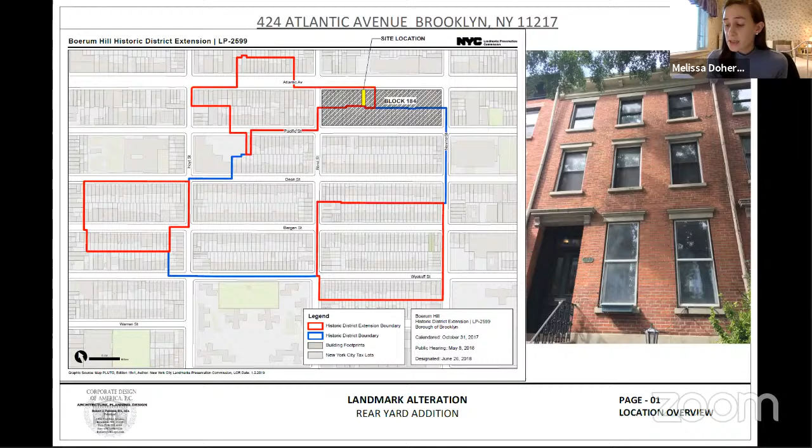This addition will be modest in terms of depth and will maintain significantly more central green space by comparison.

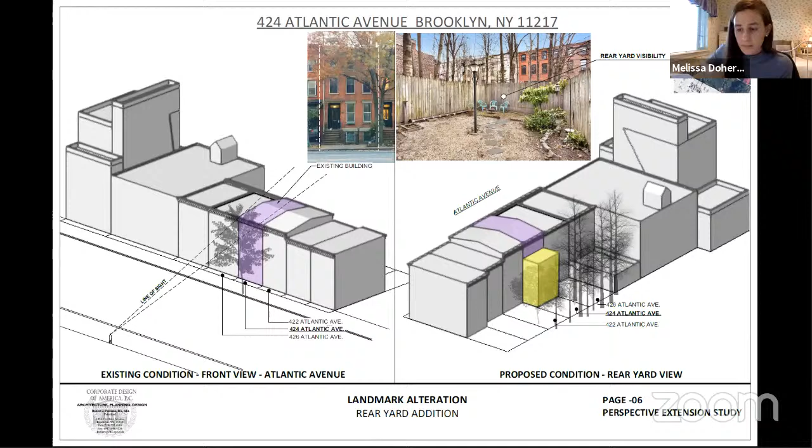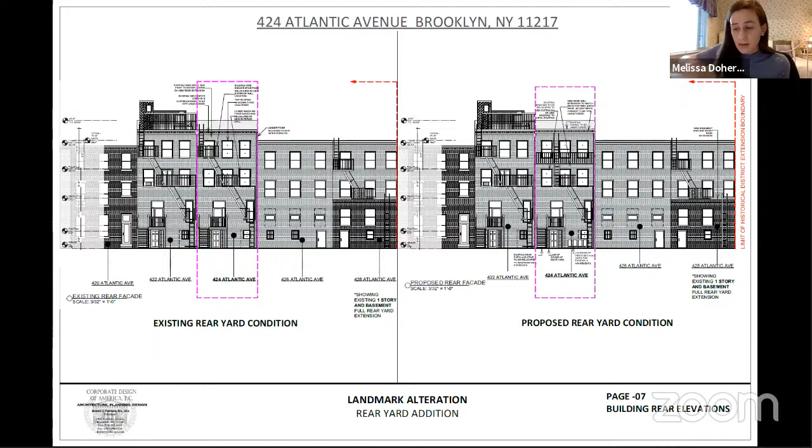Here we have the existing and proposed rear facade elevation drawings with the two adjacent properties on either side shown here. And here we have a more close-up view of that rear facade elevation.

As you can see, the proposed addition will be a total of 3 stories in height and will be fairly consistent with the existing rear facade in terms of materials, design, and even fenestration. It will consist of plain brick masonry. This will also include a terrace on top at the 3rd floor, and the existing fire escapes present at the rear facade will be retained and reinstalled at the new addition.

Here we have some more context photos showing the existing conditions at the rear of the subject property and at the two adjacent rear facades.

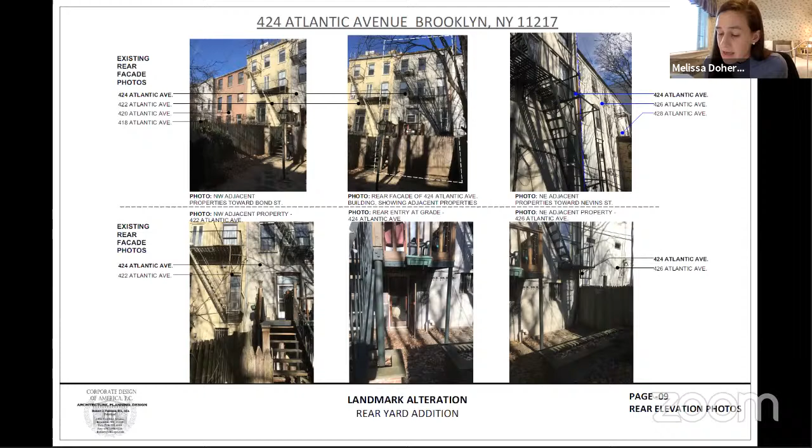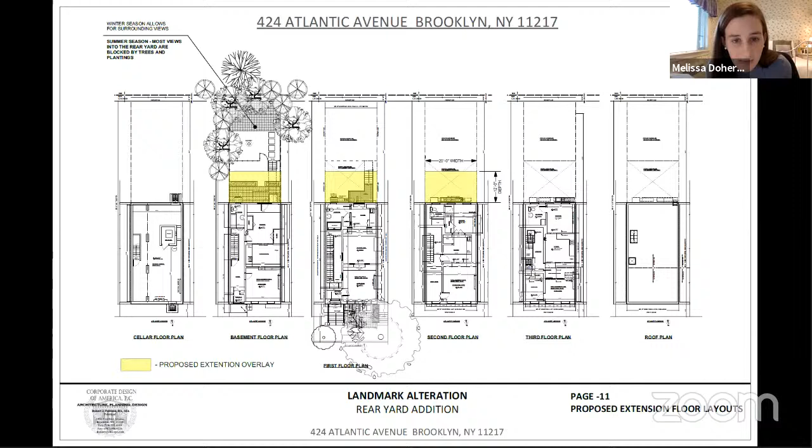Here we have the existing floor plans with an overlay of that proposed addition at the basement, first, and second floor.

And finally, we have some renderings of the proposed rear yard addition at several different angles and in detail within the context of the site.

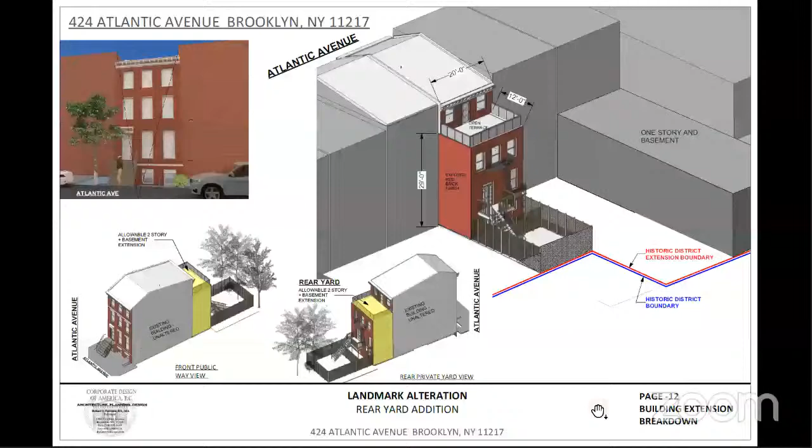Yes, so the 3D block plan. As Melissa mentioned before, the extensions, if you look at the entire block, they go full height, full depth of the lot, even though they go only 2 stories. So in comparison, even though we have 3 stories as an addition, it seems much less in scale compared to other rear extensions.

There is also an example in the lower left of an extension in the rear that is a combination of 3 and 2 stories towards the lower left of the drawing. So I believe if we analyzed all the examples of extensions in the rear on the entire block, we're the minimum, we're the least of the extensions already in existence.

In terms of square footage, you think you'd be the smallest? In terms of square footage and actual depth of extension, yes. Okay, both criteria. And Atlantic Avenue, is this section commercially zoned, which allows for full lot extensions, which I guess explains the variety that we see here.

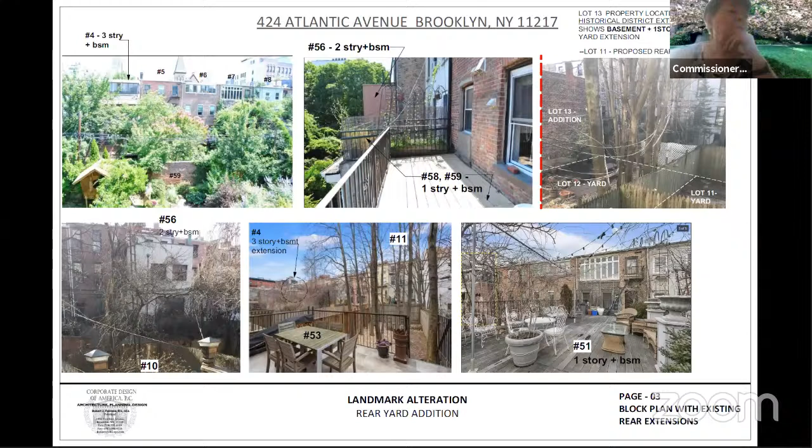If I may speak, on the opposite side of the block, the buildings facing Pacific Street, if you look at the lower left corner, it's labeled building number 56. This extension goes all the way up to 2 stories and basement. The larger extension goes 2 stories and basement, which approximately matches our proposed extension, but in this case it goes even past the 12 feet we're proposing, so it's slightly larger than what we're proposing.

Besides that, you have 1 story and basement additions. So these are the best comparisons to what we're proposing. Thank you. Do we have any other questions?

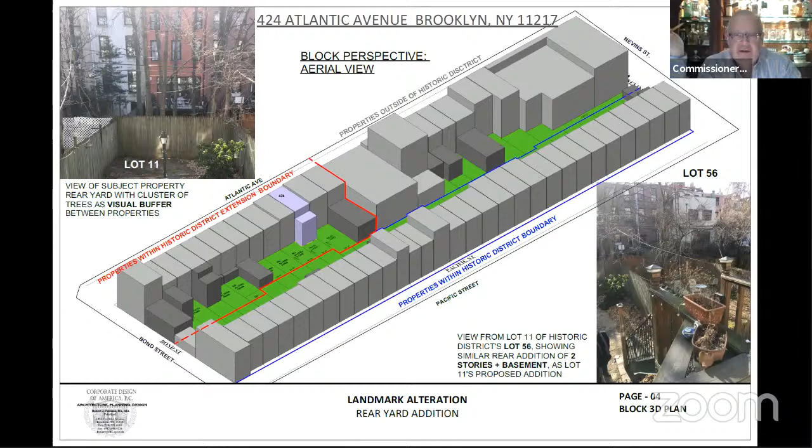Commissioner Jefferson? I approve it, I agree with my fellow commissioners. Commissioner Gustafson? Yeah, I think from every standard that we use, this is appropriate. It's modest, it's not visible, its design is compatible. There's no issue here whatsoever for me.

All right, so I think we're all in agreement that this is appropriate in this context and on this particular building. So Commissioner Shamir Barron, would you read the motion?

Yes. In the matter of LPC 2001817, 424 Atlantic Avenue in the Boerum Hill Historic District Extension, a transitional Greek Revival Italianate style row house built circa 1855, the application is to construct a rear yard addition. I note the building's style, scale, materials, and details are among the features that contribute to the special architectural and historic character of the Boerum Hill Historic District Extension, and that Atlantic Avenue is a commercial thoroughfare where full lot rear additions are allowed by zoning and rear yard conditions are varied.

I recommend approval, finding that the proposed rear yard addition will not eliminate any significant architectural features, that the proposed work will not be visible from any public thoroughfare, that the proposed addition will be modest in terms of depth and will not diminish the central green space, that the presence of a 2-story addition will not overwhelm the building or detract from the special character of the block, given the building's location on the commercial side fronting Atlantic Avenue, which contains several deep 1-story rear yard additions and other larger commercial buildings, that the proposed addition will harmonize with the existing rear facade in terms of design, material, and fenestration, and that the work will not detract from the special architectural or historic character of the building or district.

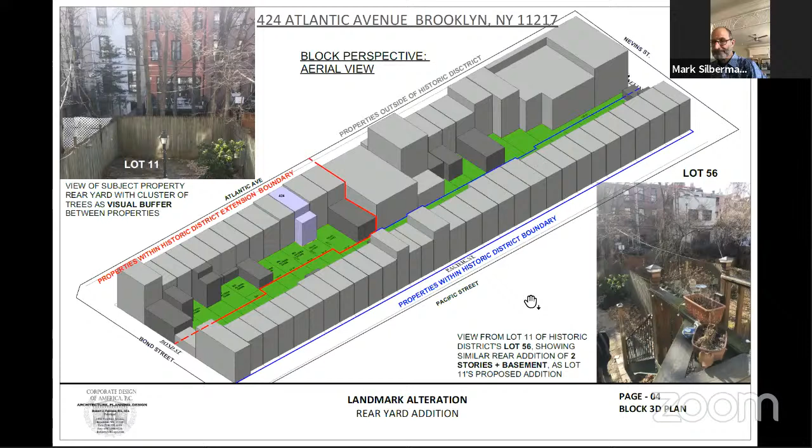And Mark, are you calling the votes? Yes. Chair Carroll, Aye. Commissioner Bland, Aye. Commissioner Shamir Barron, Aye. Commissioner Chapin, Aye. Commissioner Chen, Aye. Commissioner Devonshire, Aye. Commissioner Goldblum, Aye. Commissioner Gustafson, Aye. Commissioner Jefferson, Aye. Commissioner Lutfy, Aye. Commissioner Holford Smith, Aye. With 11 in favor and 0 opposed, the motion passes.

All right, so that's approved. Thank you. And we'll move to the next item.

The next item is hearing item number 2, LPC 21-08216, an application for a certificate of appropriateness in the Borough of Brooklyn, Block 43, Lot 25, 70 Hudson Avenue in the Vinegar Hill Historic District. This is a Greek Revival style row house built circa 1828. The application is to install entrance infill, stairs, porches, and windows.

Commissioners, the applicants have joined the hearing. You now have control of the presentation. You can use your arrow keys to advance the slides. Please remember to unmute yourself and state your name for the record, and you may begin.

If you could just please unmute yourself. Vanessa, we cannot hear you. Please unmute yourself. I have to go back to the beginning and start over the presentation. Is there someone else who can step in, perhaps the staff? Hello, can you hear me now? Yes, we can hear you now. Oh, great. So I have no controls on my screen, so I couldn't unmute myself. Thank you. If you can go to the first slide. You have control of the presentation. So oh, I do. Just click on it. It was just the audio that was having issues, so you can continue. Okay, let me. Apologies, I'm trying to get to. So the arrows are going the wrong way.

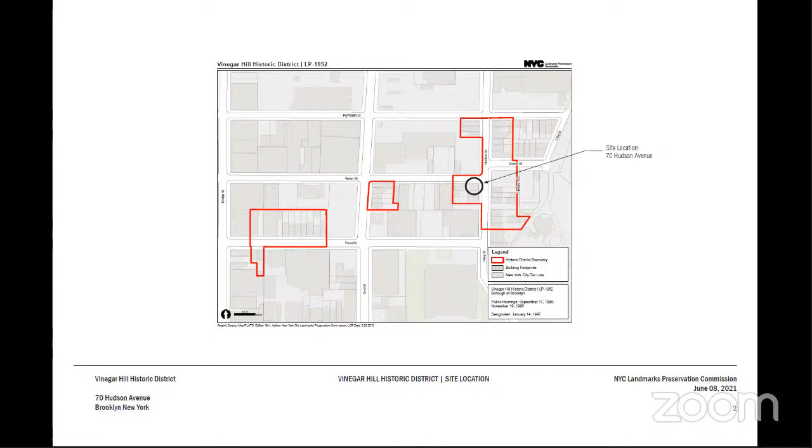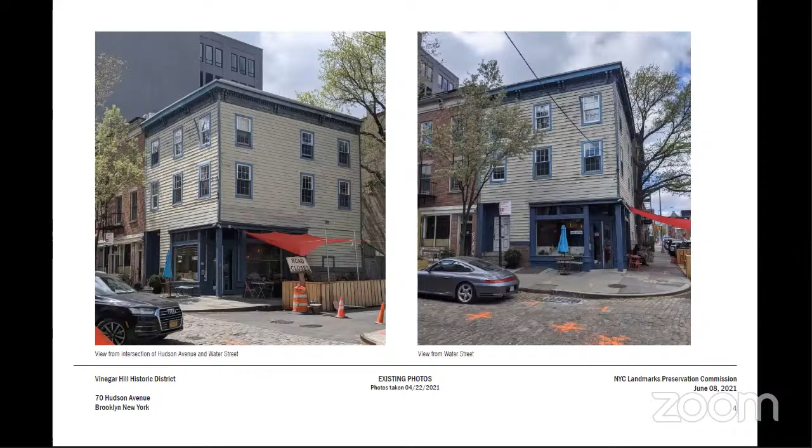As a note, the red tarp shown and shed structure at the rear yard is temporary. They were installed recently by the first floor tenant, and this is not part of the final proposed design and will be removed. The designation report lists wood clapboard as the original existing facade material at time of designation.

We are proposing to maintain this facade material as clapboard siding. This is a change from the previously approved application, which called for cedar shingles with a thatch paint finish.

So now I'm going to go through the elevations. For context, the existing elevation is all the way to the left. The previously approved elevation is at the center, and the proposed elevation is all the way to the right. There's revision clouds at the areas where the changes are.

For the Hudson Avenue elevation, clapboard siding is to remain and to be repainted to match the existing color. The residential entry will have bluestone treads over brick steps, a solid wood door with side lights and transom. There will be a trim piece added along the edge of the building to match the historic condition, and a globe light fixture at the entry alcove is being proposed.

At the Water Street elevation, the only change you can see is that the clapboard siding will be remaining. If you look to the elevation all the way to the right, there were previously approved balconies that had cedar shingles as a finish, and we are proposing to have clapboard to match the existing building. So that would be the cladding for the balconies.

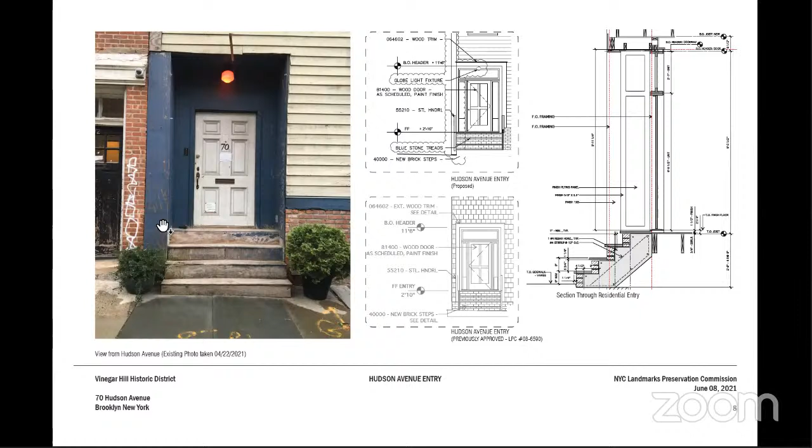The door opening is a few inches wider. No, actually, the door opening is correct. What happened is there was an edge condition that wasn't detailed correctly, and you can sort of see it here. So we had to make it a little bit more symmetrical. Okay, so what was previously approved was not drawn correctly. Yes.

Okay. Other questions?

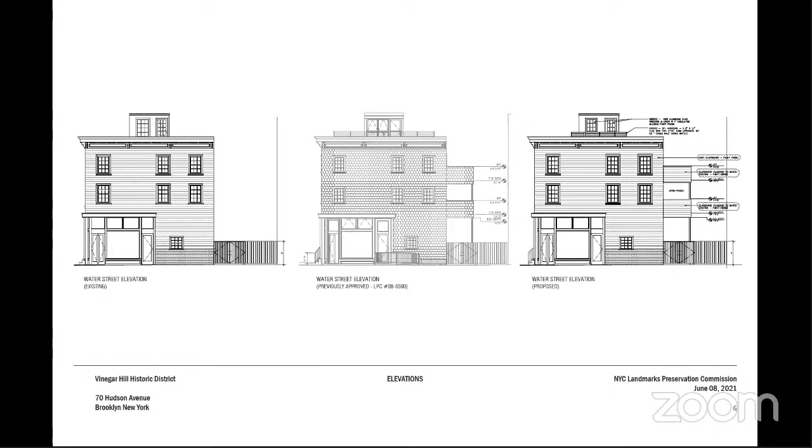But the idea is actually to keep what you have and then add to it, right? Yes, the idea is to keep what is there, and if there is a piece that is not in the correct condition, to replace in kind and have it match what's existing. It's clear, thank you.

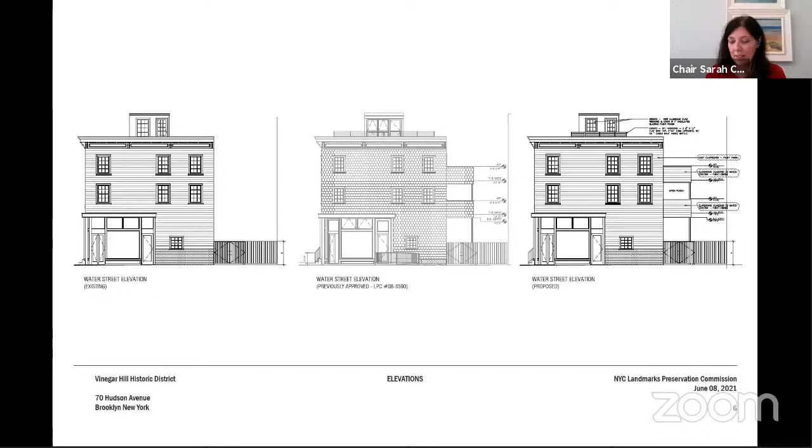And of course the new detailing on the balcony now that it's supposed to be clapboard. So it's really those three areas, which is really two areas, I guess: the front entry area and the rear facade fenestration and balconies. Commissioner Holford-Smith, would you like to start this one?

Sure. Well, I'll start with the clapboard. I think that given that it's the existing condition and they're looking to repair it, I can find it appropriate to maintain it. I think that they should maintain the corner trim boards that are there. I'm hoping that that was just an omission in the drawing, that they wouldn't be taking those off.

The rear facade - I think that changing the windows from the 6/6 to 1/1 is not appropriate. I think they should remain 6/6. And I think perhaps the applicant could work with staff on the organization of the back windows. The one on the second floor, that fixed window, is very out of place, that sort of horizontal configuration - I think maybe they could work with staff on that.

And I think I would recommend the multi-light even for the bathroom windows. And as for the porches, I agree, I think that they need to work on the details, which are very undeveloped here and hard to understand. But I think the clapboard is an odd choice to clad the porches.

And I would think that something more open, like a wood picket, would be more appropriate.

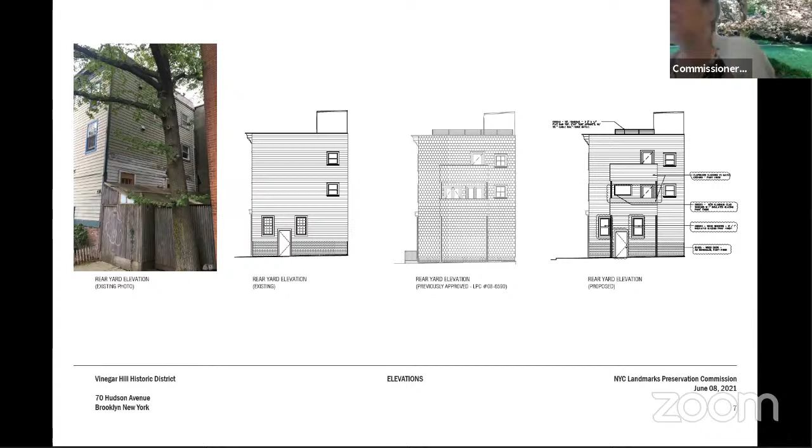Commissioner Chapin: I agree with all of what Commissioner Holford-Smith just said. I think in general the proposal is moving in the right direction. They just need to work with staff on the details, particularly the rear elevation and the fenestration, but also all the other details which Commissioner Holford-Smith went through, which I won't repeat.

Commissioner Goldblum: I agree, as Ann had said. Commissioner Devonshire: I agree with Ann as well. Commissioner Chen: To disagree with Ann. Commissioner Bland: Yes, Ann sets the pace.

But I also want to emphasize the issue she brought up, which is the railing around the balconies - it seems odd, almost like it's also a 19th century thing. I think it should be separated visually so it's clear this is an addition.

Commissioner Lutfy: I agree, although I'd like to note that in our previously approved version, the railing on the porches, we approved a railing that was completely shingled, and the applicant basically did the same thing except with clapboard. So I'm happy to go along with the fellow commissioners, but I think what was proposed was consistent, except for materiality, with what was previously approved.

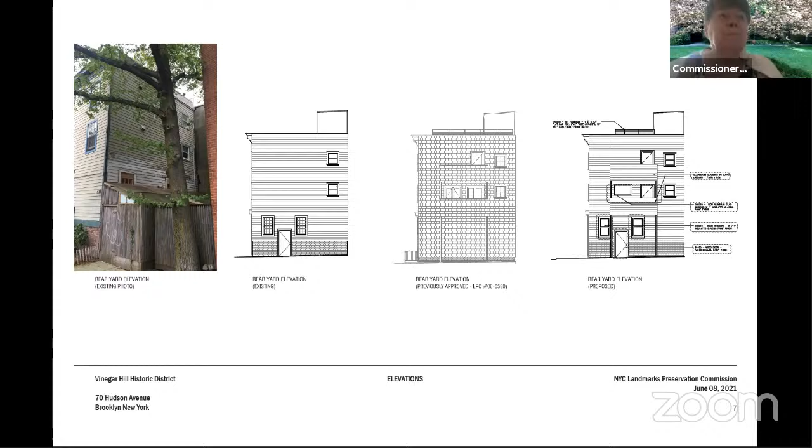So it's approved with those modifications. Please continue to work with the staff, and we'll move to the next item.

The next item is number 3, LPC 21-08498, an application for a certificate of appropriateness in the Borough of Manhattan, Block 142, Lot 14, 31 Harrison Street House, aka Jacob Ruckle House, individual landmark. This is a federal style row house built in 1828, and the application is to legalize the removal of shutters without LPC permits.

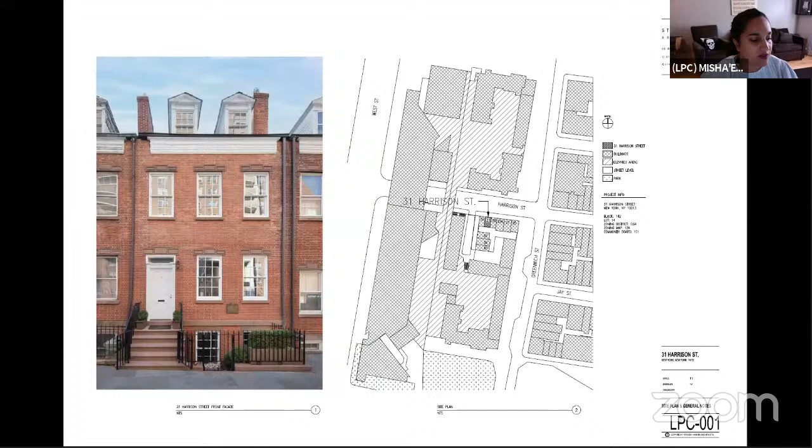Sounds good. Good morning, Commissioners. Michelle Shabrami of the Preservation staff. The application before you is for legalizing the removal of shutters from 31 Harrison Street, which is located between Greenwich and West Street, without a permit from the Commission. 31 Harrison is one of 9 federal-style townhouses that were located in an urban renewal area during the 1960s and 1970s and designated as individual landmarks in 1969.

3 of the townhouses were moved from Washington Street to Harrison Street in 1971. In the 1970s, shutters were added to 31 Harrison Street and other houses in the group, as you can see on this slide, and the houses were sold to private owners. The terms of the sale require that the buildings be restored and that changes are approved by the commission. The commissioner should note that the removal of shutters at 2 of the houses were legalized by the commission in 2009 and 2015.

Please let me know if you have any questions if the architect isn't here. Thank you, Michelle. Okay, commissioners, any questions?

So, these are buildings that were relocated as part of an urban renewal plan. When they were relocated, they did not feature shutters. In 1975, shutters were added, and we've twice approved removal of shutters. Yes, Commissioner Gustafsson. Yeah, when we approved twice the removal of shutters, we were approving the removal of historic shutters. No, they were installed on the building in the 70s. They all were not historic installed. So I'm talking about the other 2 that we approved. Those were also not original.

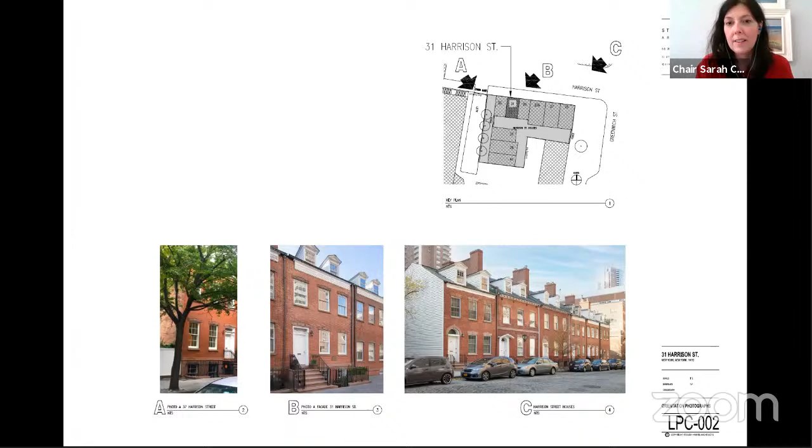Correct. So just to follow up on that, Michelle, none of them had shutters when they were moved, right? The shutters were all added in the 1970s. I believe so. Let me go to the last slide. This is a picture of the buildings historically - there are no shutters. And this is a picture from 1975 when shutters were added to all of the buildings, or many of them. Okay. All I'm trying to get to is whether we actually did exactly the same thing previously. Yes, we did.

Okay. Commissioner Jefferson. You just have to unmute. Do we have any research on what the original shutters look like? Do we know authentically what they were? I can't recall if they were louvered or paneled. Sarah, do you remember from when we looked at this previously?

No, but do we believe that the buildings originally did have shutters? I seem to recall from the first time that we brought 27A before the commission that they were showing elevation drawings where the architect always drew federal style houses with louvers on them, but I can't recall the type. Okay, thank you. So we don't have an authentic record of it at all, of what was originally there. We do not. Okay, thank you.

Commissioner Holford-Smith? Yeah, I have a similar question as to whether there were shutters originally on the buildings prior to their being moved. There were not shutters. Yeah, but had they been originally on the building? Could have been. I think we don't have the record. We don't know.

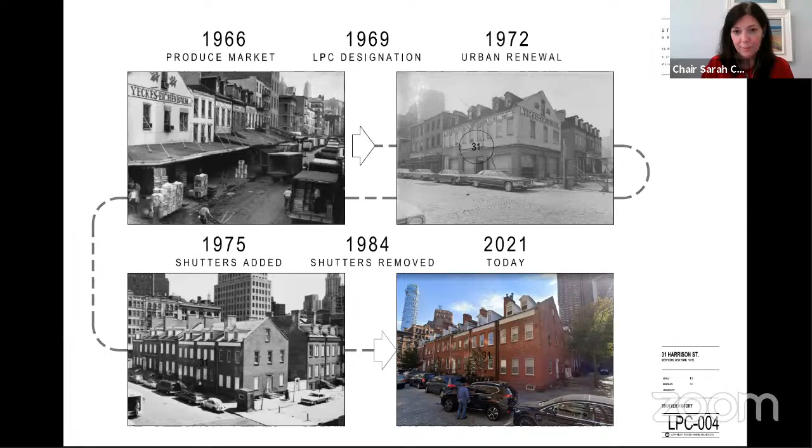So Commissioner Devonshire, would you go ahead and read the findings? Sure. I didn't check the background. Sorry, Sarah. That's okay.

In the matter of 31 Harrison Street, the Jacob Ruckle House, an individual landmark, the application is to legalize the removal of shutters without landmarks preservation permits. I recommend approval, finding that the historic shutters were removed prior to the designation of the building as an individual landmark, if in fact they existed, that the removal of the modern replica shutters did not remove any historic fabric, and that within the context of the neighboring individual landmarks, none of which retained exterior shutters, the lack of shutters does not detract from the historic character of the house or the adjacent landmarks.

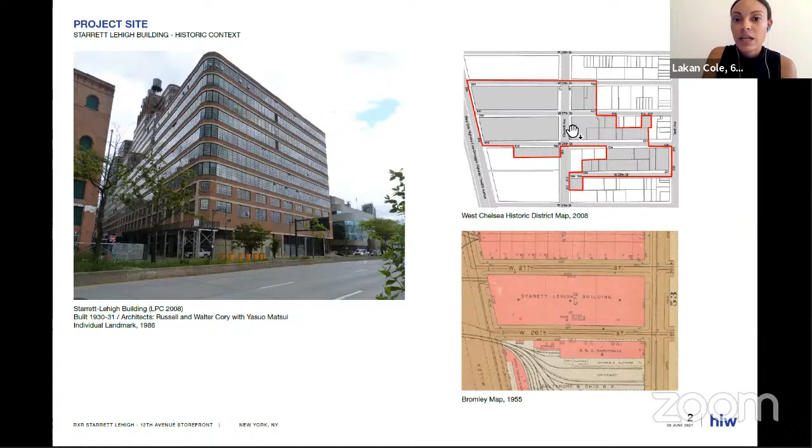This is the building here pictured from 12th Avenue looking south, and this is the building's location within the historic district. It's a very large building spanning a full city block, bound between West 26th Street, West 27th Street, 11th Avenue to the east, and 12th Avenue to the west. Oh, sorry, a little ambitious there.

The owner is committed to it, and in fact, it has been installed across the majority of the east side of the building where there are currently retail tenants — on 26th Street, around to 11th Avenue and 27th Street. The master plan has not been built out to date along the west side of the building, because this area is occupied by a long-term lease non-retail tenant, Verizon, and their operations are not compatible with storefront infill. Meanwhile, the owner still wants to improve the exterior appearance and existing conditions across the base of the building with a cohesive design.

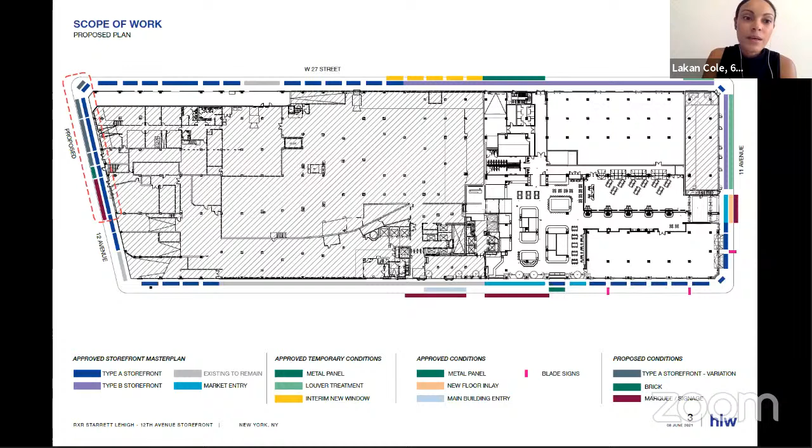So this application for 12th Avenue is in the same vein. Again, we're not proposing to change the master plan, but to install an interim storefront while the space is tenanted with a non-retail use.

Here is the overall building elevation and the location of the 12th Avenue storefronts. It's at the north half of the building.

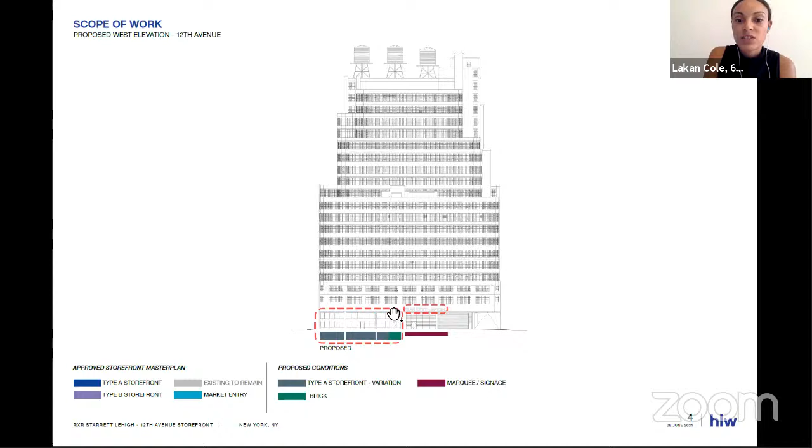Also, the second part of the application, which I'll get into in more detail later, is building signage. We're proposing building signage above the center of the 12th Avenue base, as well as building signage at the marquee of the main entrance on 26th Street, and to modify previously approved signage at the marquee adjacent to that entrance.

Refocusing on 12th Avenue, this is an existing condition photo. The area of work is defined by this pier to the north and this one at the center. From north to south, the existing conditions are predominantly not historic in the northern portion. The first bay is partially infilled with storefronts and then partially open for a driveway and parking area. Here at the center are storefronts that date to about the mid-1980s.

There was previously glazing at the base. There is an existing spandrel which obscures a beam and supports a mezzanine at the interior behind. And then there are multi-light windows at the mezzanine, again all dating to the mid-1980s.

And then here at this bay, just south of the storefronts, there's recessed CMU infill that is not historic. And at the center, there is an egress stair faced in brick. That condition is the one historic condition within this area of work.

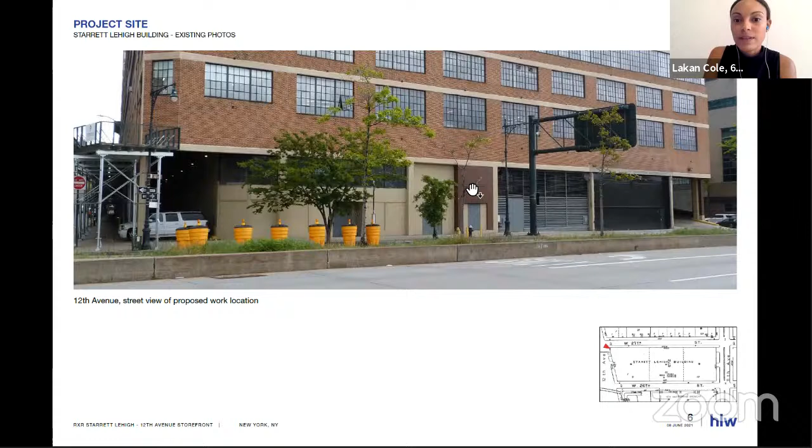As a reminder, historically, the base of the building operated for the Lehigh Valley Railroad and was a train terminal and warehouse where trains and trucks would enter the building and unload. In this plan, focused on 12th Avenue, it operated the same as the rest of the building. One thing to note is this egress stair that was originally at the center of the building and remains.

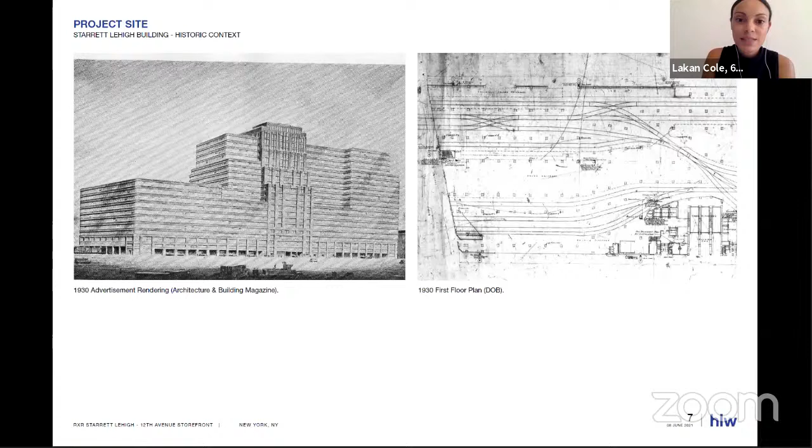Here are historic photos from the 1930s. Again, that egress stair at the center of the area of work, and then there were historically open bays further to the north. Also on this side of the building, historically there were various iterations of signage above the ground floor. So signage is part of our application for the west side of this building, and I just want to point out that detail here.

I mentioned in the introduction that we're working around some existing tenant constraints in this proposed design, meanwhile trying to improve the overall appearance of this area of the building to the west side highway and parks. The interior tenant is Verizon. Behind these boxed out show windows are interior walls that confine their maintenance operations on the ground floor. And then the spandrel reflects an interior beam that's supporting a mezzanine where there's office space occupying that area of the floor plan. Again, these multi-light windows are not historic.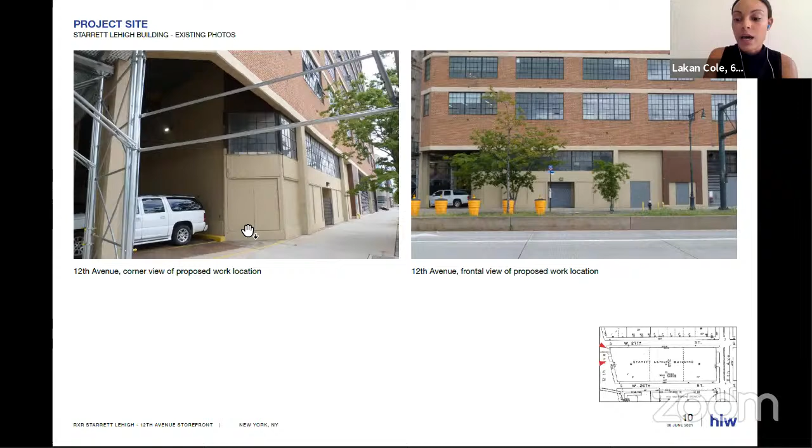So to not disturb the tenant in this proposed design by the building owner, we do need to maintain this mezzanine at the interior and some privacy at the ground floor. You'll see that in our proposed design.

Here are comparative elevations: existing, the master plan approved, and then our proposed modifications. Again, this is the structural mezzanine that we are seeking to maintain for the tenant's office operations on that floor. As you can see in elevation, that mezzanine structure cuts right through the center of what would have been a master plan storefront. So what we're proposing is to retain the mezzanine and that existing spandrel, paint it black, and install master plan inspired open glass and metal frame storefronts above and below that existing spandrel.

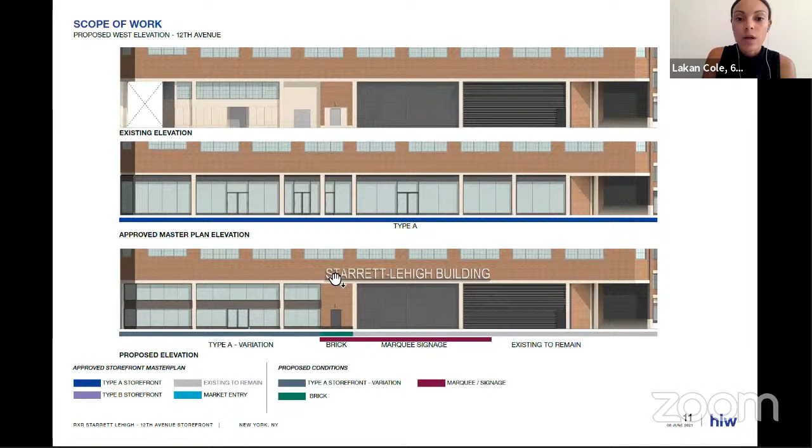And then here at the historic egress bay, we're proposing to retain that condition as it is existing, but to reface it with new brick to match the building standard, and above the ground floor install illuminated building signage. A closer look here at the master plan elevation and the proposed elevation.

In general, the master plan design was conceived in order to respect the historic large train and truck openings at the base of the building defined by these piers. And we are seeking to do so in the proposed modified design as well.

Also in the master plan, we propose to infill the corner of this northernmost bay, which is currently partially open after the 1980s partial infill. And that is part of our current application today, to install this interim storefront through to the 27th Street facade.

Here's how that condition will look as it turns the corner on 27th Street. These are the existing conditions on 27th Street: open bays with a masonry wall, where this area in front adjacent to the sidewalk is used for parking.

We are not proposing any changes to the 27th Street elevation. What we are proposing is that where you see straight through to 12th Avenue currently, that will be infilled with storefronts, and we propose to close the wall with a new masonry wall to match the existing.

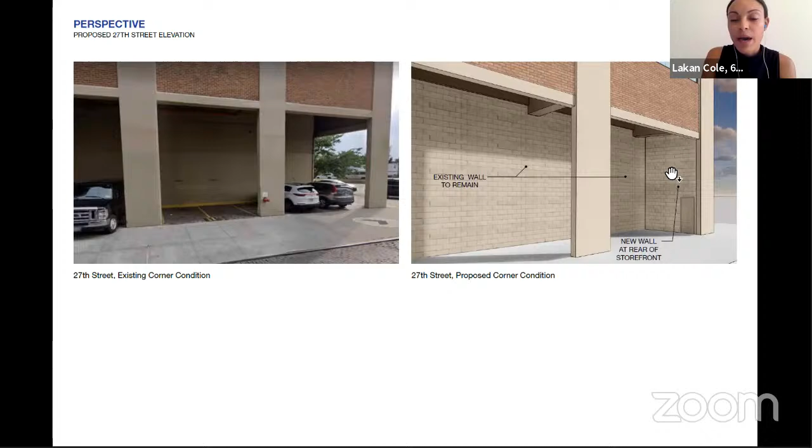Here is a comparative existing and proposed ground floor plan, and you can see the proposed corner condition in better detail here. This is the partially open corner where we're proposing to install a masonry wall to close out proposed storefronts along 12th Avenue.

At the interior, the Verizon space is confined behind these existing interior walls, and those would remain in our proposed design. Because we are removing the CMU within this center bay and opening up their operations to visibility, we propose to install a similar interior wall, 2-foot setback from the show window, in this bay. The egress bay will remain roughly the same, but faced in new brick to match the building standard.

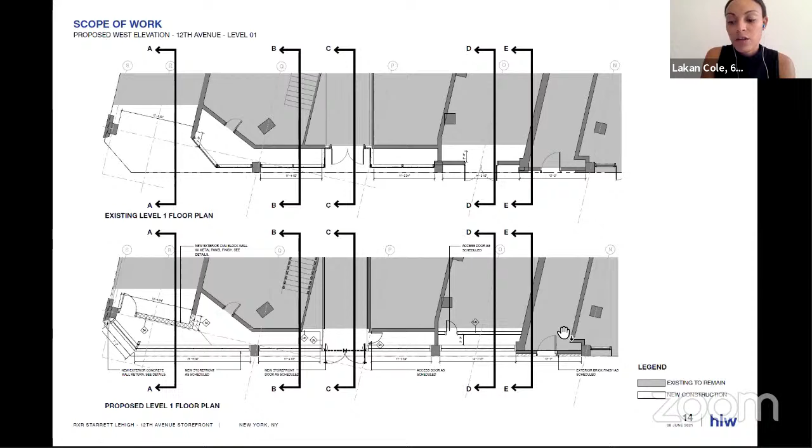Here is a mezzanine plan showing you the existing mezzanine that we are seeking to retain in our proposed design.

Here's a storefront section, a typical section cut through a storefront window showing the existing conditions and the existing mezzanine. This red dashed line shows in greater detail how it cuts through the approved master plan design, and thus prohibits installing that design type at this time.

So we would retain that mezzanine and the corresponding exterior spandrel, again painted black, with new storefronts above and below. Other than the proportional difference here, the storefront infill would be the same as has been approved under the master plan, with the same detailing and recessed character from the exterior piers.

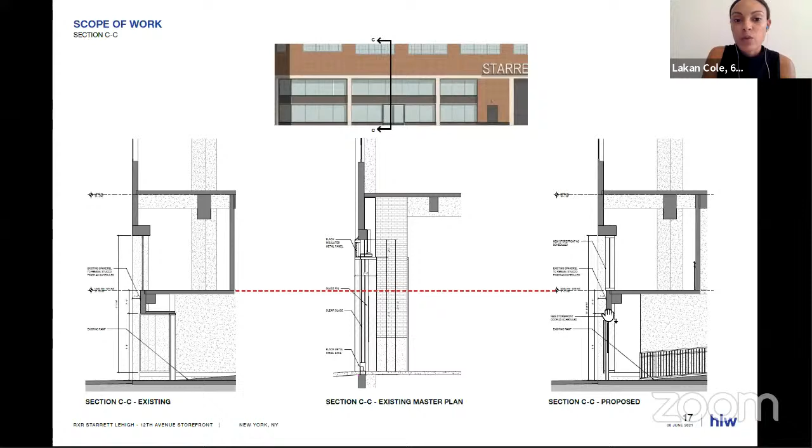Here's a section cut through the entrance. There is an existing deeply recessed entrance to the Verizon space. We propose to bring that entrance a little closer to the face of the building, to be in line with what would have been a storefront master plan design entrance.

Here's a section cut through the egress bay. Again, the existing conditions will remain, but we'll be replacing the face brick that is painted with new brick to match the LPC approved building standard.

Beginning above the egress door, centralized illuminated signage would be installed above the ground floor. Here's a detail of that signage.

It's 3'10" letters set on a 6-inch underscore. The signage is aluminum framed with acrylic facing, and it has LED illumination behind it to give it a halo glow, set on an underscore. The attachment will be through the underscore, attached into the building, and that's where we'll receive the lighting supply as well.

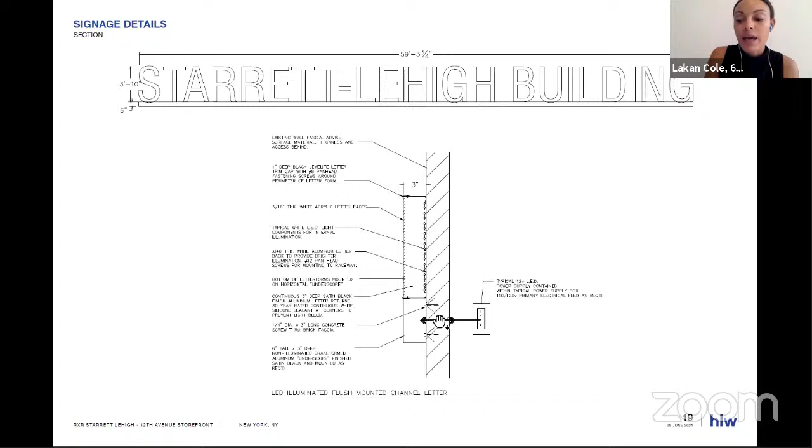Here's an overall rendering showing that proposed design. I want to point out, as you see, we are proposing to retain existing interior walls and install one new interior wall behind these new storefront windows at the ground floor.

We're also now proposing to install historical imagery. That was a direct response to the community board asking us to enliven what we had previously proposed as white walls behind the glazing. So this is what that will look like.

In terms of the signage, we have proposed signage at other areas of the building, and the typology and general illumination of the signage is characteristic with what has been previously approved at other sides of the building.

Moving on to 26th Street, we proposed under two different applications to the commission: a marquee and associated signage. One application was for a marquee above the main entrance, which had numerals within the sides of the marquee. The other application approved a marquee at a secondary market entrance with letter signage on top of that marquee.

Here's another look from another vantage point, looking east on 26th Street, showing that letter signage on top of the market marquee. You can't see it in this view, but there are also numbers on the side of the main entrance marquee.

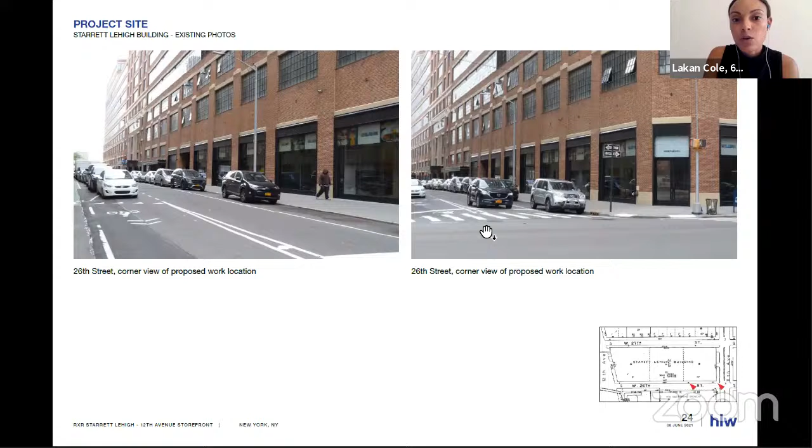We wanted to show you these photos so you can get a scale of the approach of this building. It's a very large building and the entrance is located at the center of the block, so the approach is very narrow. For wayfinding, we devised this design as most appropriate: have the market identified on the sides of the canopy, and for pedestrian level recognition, the letters for the building installed on top of the main entrance canopy, which you can see here in the far distance.

So just to clarify in elevations and sections, this on the left is the previously approved marquee and signage over the main entrance with no letters above, just numerals at the sides of the marquee. We're proposing to retain those numerals and install letter signage on the marquee above.

2 feet is the height. 2 feet was the previously approved height for the market letter signage as well. And then we're omitting that letter signage on top of the secondary market canopy and installing the illuminated letters on the side instead.

Collectively, we're proposing signage on 3 sides of the building. We think the proposed signage overall is well scaled to the entrances which they mark, and historically, the building did have signage on 3 sides.

These photos on the left side of the screen illustrate historic conditions on 11th Avenue and 12th Avenue with signage in the 1930s. On the 26th Street side of the building, historically and originally, and it remains, there is engraved letter signage at the upper level. As the building was converted from an open truck and freight terminal into commercial use, signage was incorporated at the pedestrian level, although this signage example dates to the 1960s.

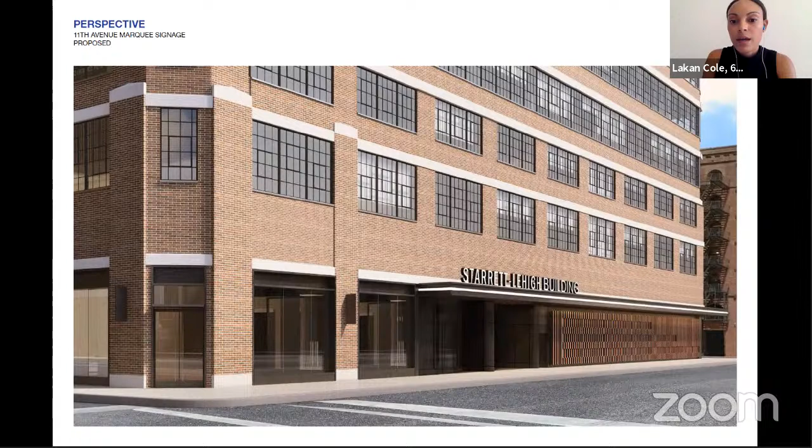To round out, just to summarize the scope, here are the 3 areas of signage we're proposing for this comprehensive proposal. This is 26th Street with the main entrance and market. This is 11th Avenue, where we have previously approved LPC signage on an approved marquee. And here we are back at 12th Avenue, where we're proposing new building signage above the ground floor and storefronts as well. That will conclude my presentation, and I look forward to your questions and comments.

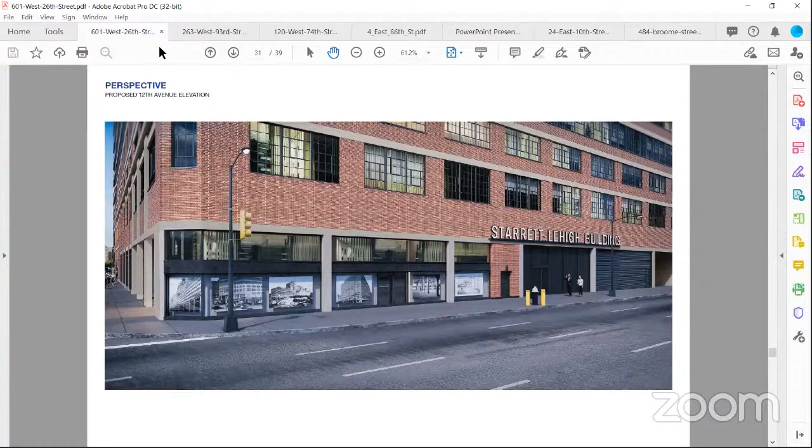Okay, so that's approved. Thank you. And we'll move to the next item.

Next item is number 5, LPC 21-07876, an application for a certificate of appropriateness in the Borough of Manhattan, Block 1241, Lot 6, 263 West 93rd Street in the Riverside West End Historic District. This is a Renaissance Revival style row house designed by Alexander M. Welch and built in 1897. And the application is to replace windows.

And commissioners, the applicants have joined. Please note that staff will be walking you through the components of the presentation with the applicants available for questions afterwards. And staff, you may begin.

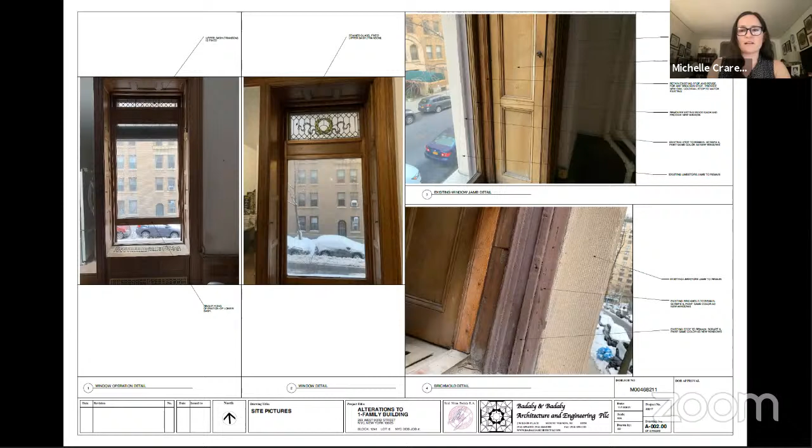Here are some additional context photos of the existing windows. The matching building at 265 West 93rd Street had its windows replaced prior to designation of the historic district. The remaining windows at the facade of 263 have already been approved for replacement by the commission.

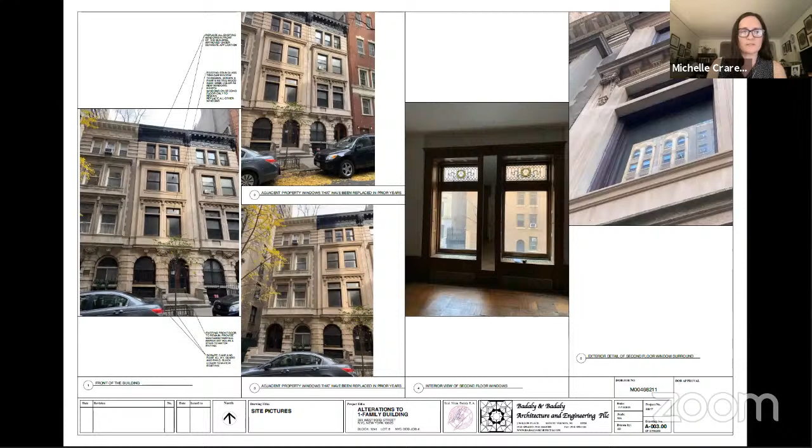The proposed replacement windows will be brown painted aluminum clad awning windows, which will match the finish and material of the windows throughout the rest of the facade. Here you can see the details of the existing and proposed windows in section, with a detail of the vertical section, the proposed vertical section on the right. And then lastly, the existing and proposed horizontal sections shown side by side.

The applicant, who's also the owner of the house, is here to add some additional context and answer any questions you have.

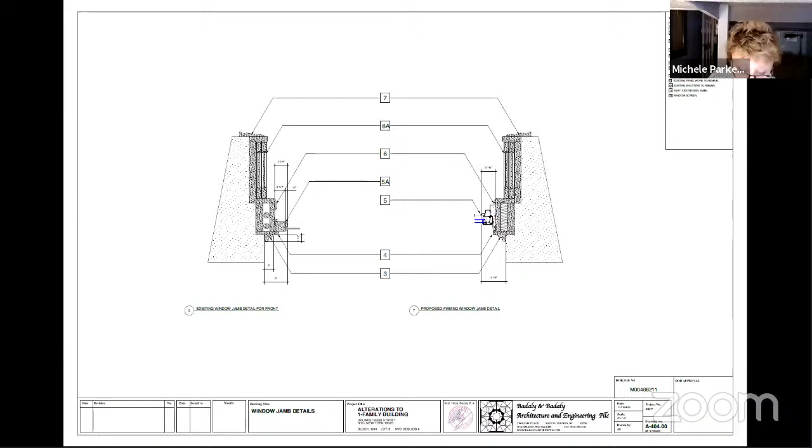Okay, thank you. I don't see any other hands raised. And Anthony, do we have any written testimony? There is nothing in addition to those who have already spoken.

Okay, thank you. Mr. Badaly, would you like to respond to the comments? I know 3 of the speakers were in support and commended you for your attention to detail, but we did get one speaker who opposed it, with questions about the condition of the existing windows, why one would need to replace them first, and then why you would replace them with a different operation. So maybe you could answer those two questions.

Sure. Yes. Good morning. The windows are in decent condition, but they are quite drafty, and 21st century lifestyle does require windows that can preserve the energy consumption of a building. Also, I'd like to mention that all the rest of the windows in the building are already approved, and we actually just received approval for them to be replaced. So replacing these two windows will actually make the entire facade of the front of the building more in harmony than not.

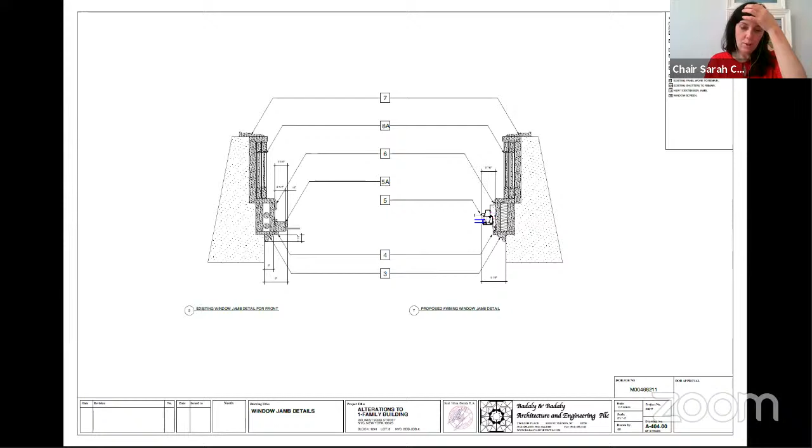Just to provide some context for the discussion: the commission's rules that allow for staff-level window replacement do not require a condition statement unless the window is determined to be a special window by virtue of its age, for example the original multi-light window on a federal style building, or by virtue of its craftsmanship and configuration, such as more than 12 lights in a pane, or stained glass, or curved glass.

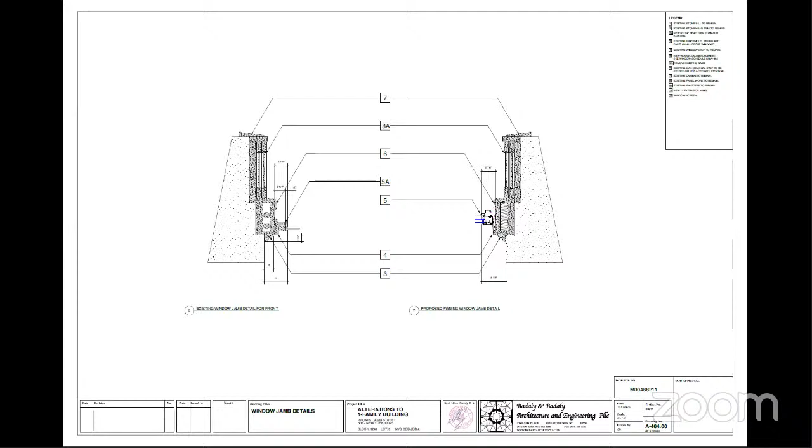That is why the staff has issued a permit for the replacement of the other windows on the facade. This one is before us because the one aspect of the rules it doesn't meet is the match in operation. It otherwise matches the number of panes—it's a single pane—and the details and profiles. So it's the change in operation that we are looking at.

Also for context, the commission has approved a change in operation for large single hung windows or pivot windows to another operation with the same configuration, so a pivot to casement, in-swing, or hopper. It's also not that dissimilar from the passive house windows we've approved, where we've approved a double hung window that matches the details of the historic double hung window but tilts in. In this case, the awning window will tilt out. With that context, why don't we go ahead and begin our discussion?

Commissioner Jefferson, would you like to start this one? Yes.

I think the system operation changing versus the aesthetic and proportion works well. I can approve this. Commissioner Gustafson: Yeah, I agree, I think this is appropriate.

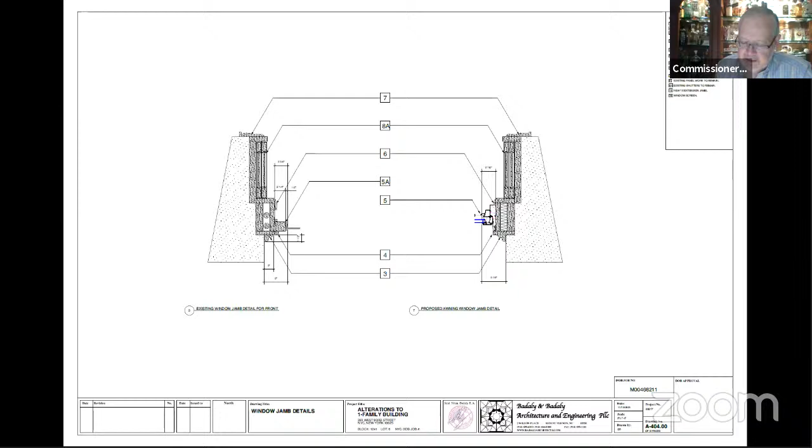I do want to state my appreciation for the fact that they didn't take this as an opportunity to remove the stained glass in the transoms. I also want to highlight that I think the applicant had an articulate, direct and excellent response to the testimony.

Commissioner Shamir Baran: Yes, I also want to commend the applicant for having gone through a real education about the types of windows and making an argument that is, I think, very convincing for his selection, but also his understanding of what it is that we consider. So I very much appreciate it. And I think that the applicant is right, because we get these thin rails here, that is the sort of preferable outcome, and the operation, despite the fact that it's changed, I think is appropriate and acceptable.

Commissioner Holford Smith: I think that the change in operation is appropriate. I don't believe that it will be visible, but I do lament the loss of the original windows, which do look like they are in good condition. My first preference would be for them to weather strip the original windows and keep them in place, but I can find this appropriate.

Commissioner Chapin: I think it's appropriate given the location. I'm glad that they're preserving the stained glass portion, and I think that the applicant well explained their needs, and I think it's fine.

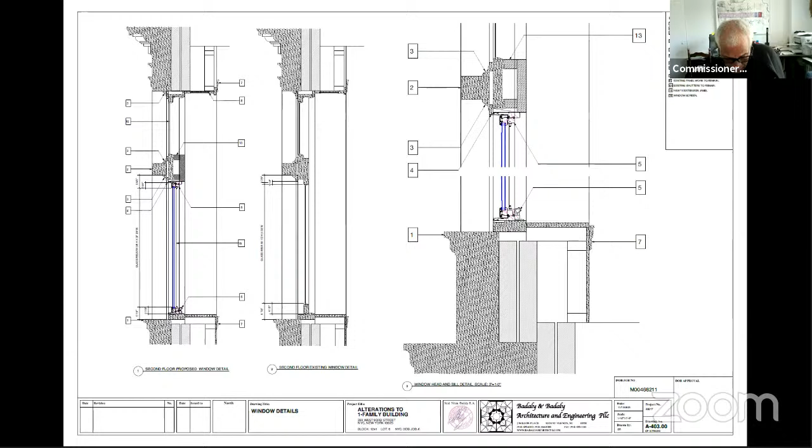21-07876, 263 West 93rd Street, Riverside West End Historic District. Application is to replace windows. I recommend approval that the work will not damage or destroy any significant features and that the stained glass transom will be retained, that the proposed window will match the material and finish of the other windows at this facade, that the proposed change in operations from double hung to awning would only be perceptible when the windows are open, that the second floor windows at the two adjacent buildings have been replaced with double hung windows. Therefore, the change in operation at this house would not diminish the unity of the row, and that the work

will not detract from the special architectural and historical character of the streetscape or the historic district. Thank you. Commissioner Gustafson, would you second that motion? Second. Thank you. Mark, will you call the vote?

Chair Carroll, Aye. Commissioner Bland, Aye. Commissioner Shamir Baron, Aye. Commissioner Chapin, Aye. Commissioner Chen, Aye. Commissioner Devonshire, Aye. Commissioner Goldblum, Aye. Commissioner Gustafson, Aye. Commissioner Jefferson, Aye. Commissioner Lutfi, Aye. Commissioner Holford Smith, Aye. With 11 in favor and none opposed, the motion passes.

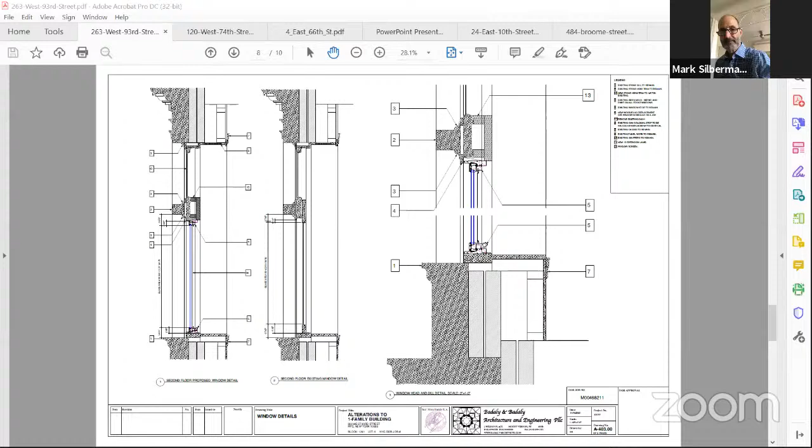Right, that's approved. Thank you. And we'll move to the next item.

Yes, next item is hearing item number 6, LPC 21-07454, an application for a certificate of appropriateness in the Borough of Manhattan, Block 1145, Lot 41, 120 West 74th Street in the Upper West Side, Central Park West Historic District. A Queen Anne Romanesque Revival style row house with Moorish elements designed by Thom and Wilson, built in 1886 to 87. The application is to amend Certificate of Appropriateness 19-8641 to modify the proposed rear yard addition.

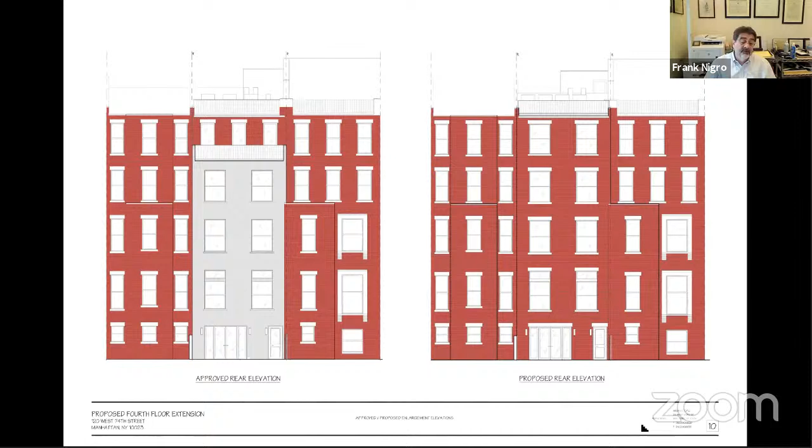Okay, we've worked closely with the Landmarks team and tried to address everyone's concerns as much as possible. But as you can see from the photos, the rear yard is really quite a hodgepodge of railings, parapets, bulkheads, no parapets at all. So we think that having a rear facade of brick is preferable to having a 4-story stucco extension to the building.

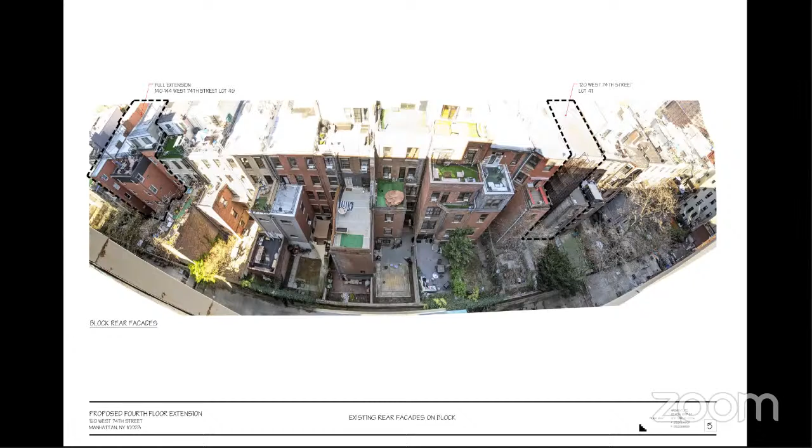Okay, and while we have this photo on, in your row you have a couple of buildings that have a projecting bay at the back that starts all the way down at the ground and extends up to the top floor. And I assume those, as well as the other buildings in your row, all feature corbelled brick cornices or corbelled brick at the top.

Quite frankly, I cannot tell you because I don't know that we have any photographs of that. Let me see something. Okay, can I zoom this in? This photo might work. But as was mentioned in the testimony, there's corbelled brick at the top of your building. Yes, we do. Okay, and this is a good photo because you can actually see the other buildings in the row that have the full height projecting bay at the back.

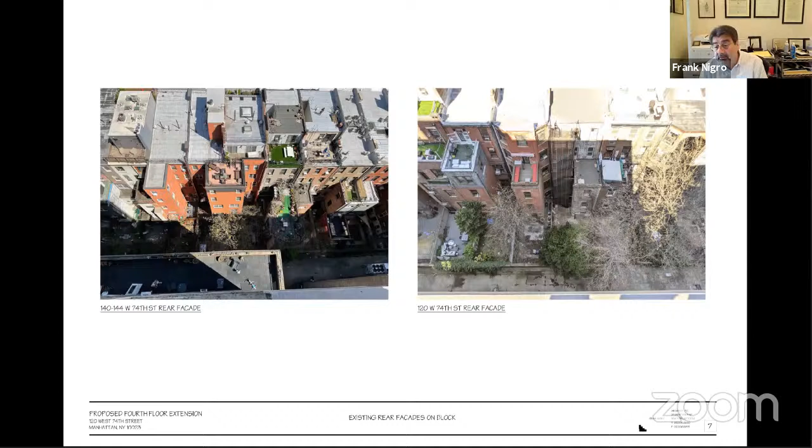And there was testimony about the fenestration pattern not relating. So I was thinking about the bay, you'd have the 3-bay pattern, and I don't know if you've explored looking at that as a model. It doesn't really work for our purposes. And as far as the windows are concerned, those we inherited from the prior approval. We could not change those and keep our prior approval. We would certainly be willing to work with the Landmarks staff if they think the windows might want to be replaced or modified in some manner.

Well, I think this comes from how, many times when the commission looks at rear yard additions, as was stated in the testimony, the commission likes to see the top floor be the place where fabric is retained, and also a relationship to the rest of the row can be read at that top floor, and we're more flexible on the lower floors. So again, the fenestration pattern at the top floor is a place where that continuity can be read. And because you have some projecting bays in your row, that's why I wondered if that had been used as a model, that might help connect it to the rest of the row.

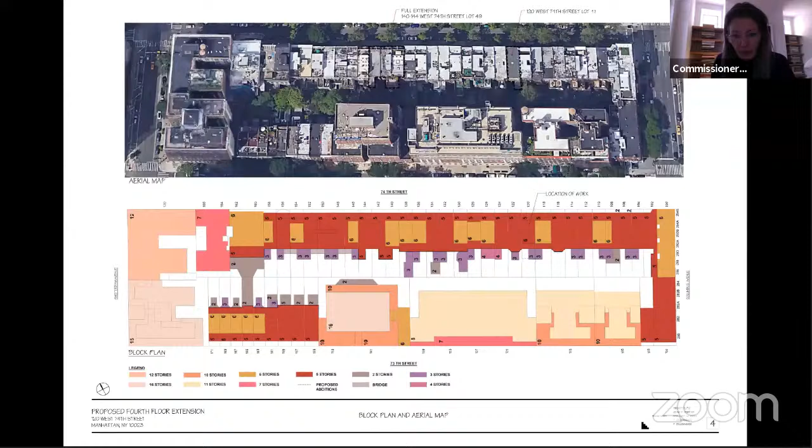Okay, commissioners, any final questions? Commissioner Shamir Barron, please go ahead. Yeah, I think you may have said it, but building number 140-144, that has a full width and 4-story extension on it, but it is not the full height of that building, is that correct? Let me double check, I'm looking at the plan. Anyway, it looks like, from what I can tell, that is the only building on that side, or at all, that is the full width extension, correct? Yes. And not full height of the building, but the height of what you are proposing, which is 4 stories? Well, we currently have approval for 4 stories. We are requesting the 5th story, yes.

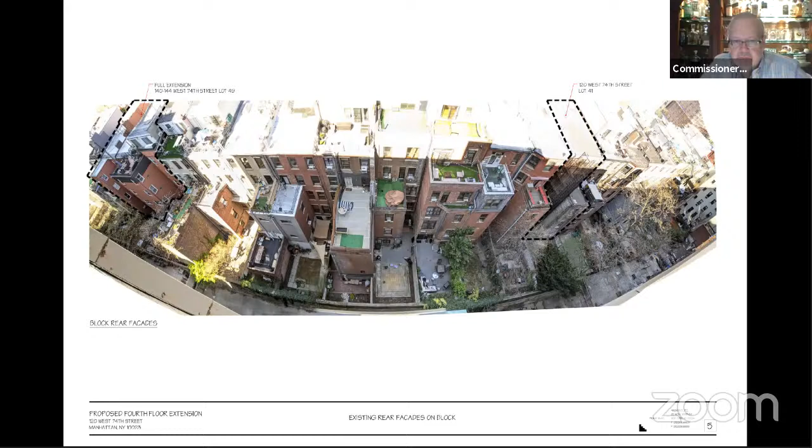Well, honestly, I don't see any reason to vary from our usual standard, which is to say we preserve the massing of the building by preserving that top floor. I see the variation here, but I don't see a justification. Commissioner Shamir Barron? I'm in agreement, the top floor in its configuration of 3 bays and not built out should be retained. Commissioner Holford Smith? I agree with that. Commissioner Chapin? Yeah, I also agree.

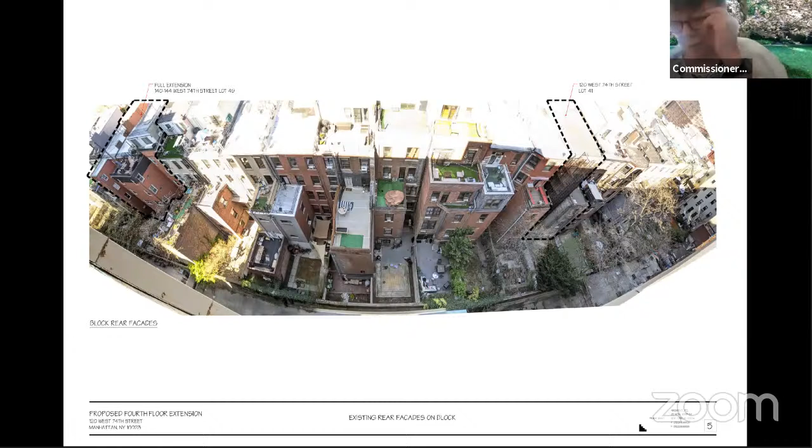Perhaps at some point we ought to take a deeper dive into the issue of how to preserve the look of rows, which could be more complicated, but I think this is appropriate in this case to preserve the upper floor. Commissioner Goldblum? I agree, and I would encourage the applicant, since they're here anyway, that we approve this with the exception of the extension up to the top floor, so that they can use the brick and stone as they have shown it, that they don't feel compelled to revert to the stucco, and that we encourage them to work with staff on the fenestration anyway.

Otherwise, I think that I agree with what everyone else has said. Okay, thank you. And I think that the change to a brick material with the stone lintels and sills, and even refining the fenestration, could all be a staff level amendment to the original approval anyway.

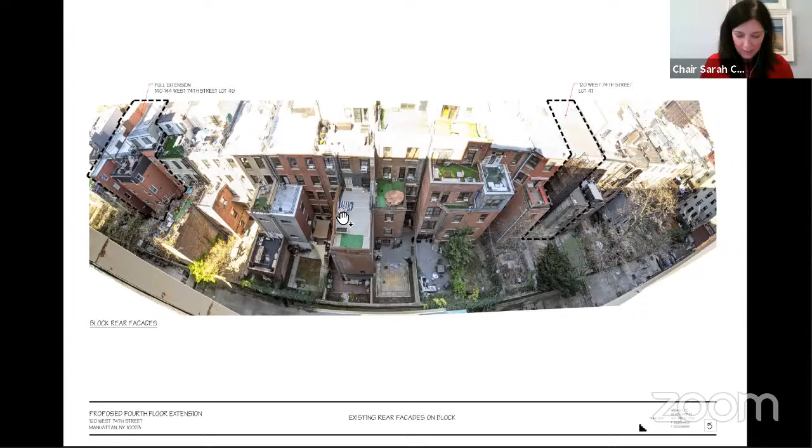Commissioner Devonshire? Good, let them revert to brick. That's good. I think it needs to stay at 4 stories. Commissioner Chen? I agree with all the comments, especially the 2 Michaels. Commissioner Bland? Yeah, stays at 4, but let's allow the brick as opposed to stucco, at staff level. Commissioner Lutfy? I completely agree.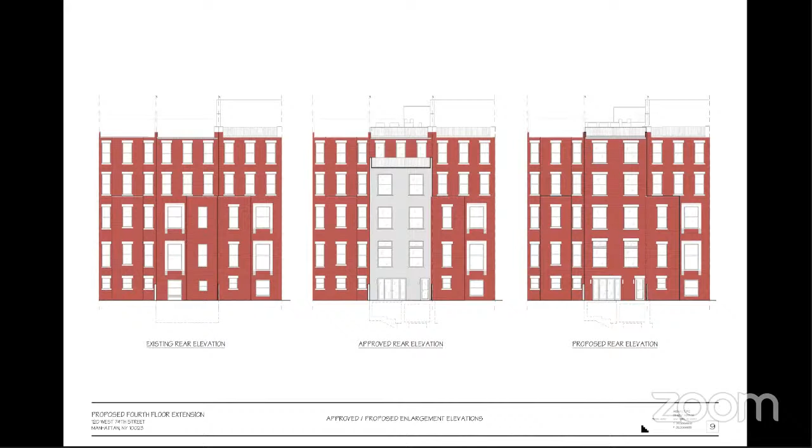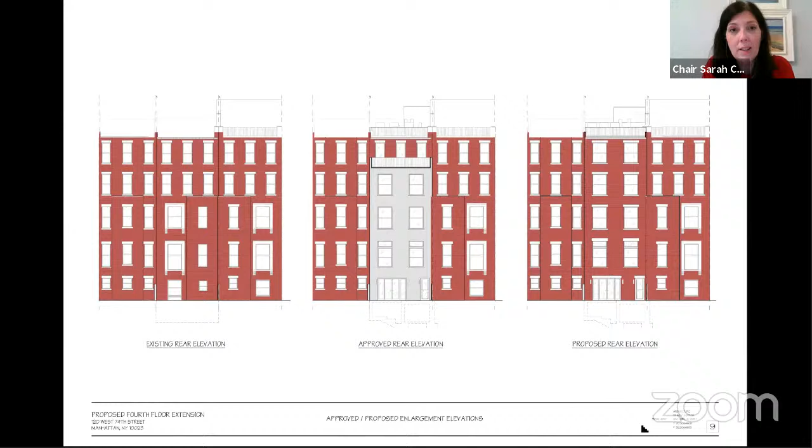Okay, great. All right, so we are not supportive of a fifth story addition here, and so we're not going to take an action on the proposal as presented today. We would encourage you to continue to work with staff to revise the existing approved addition to allow you to do the brick and stone lintels. You can even explore the fenestration pattern to fit within the context. All right, thank you, so please continue to work with the staff.

Thank you. Okay, all right, we'll move to the last item before lunch, item number 7, LPC 21-07559, an application for a certificate of appropriateness in the Borough of Manhattan, Block 1380, Lot 69, 4 East 66th Street in the Upper East Side Historic District. A neo-Italian Renaissance style apartment building designed by J.E.R. Carpenter and built in 1919 to 20. The application is to create and modify window openings and install balconies.

And the applicants have joined the hearing. Please note that staff will be walking through the components of the proposal with the applicants available for questions. And staff, you may begin. Also please note that Commissioner Devonshire is recused on this.

Good afternoon, Commissioners. Richard Lowry, LPC staff. I will be presenting the application, and the architects Peter Pennoyer and Jennifer Jericaris of Peter Pennoyer Architects are here to answer any questions.

The property is located on the southeast corner of 5th Avenue and East 66th Street, opposite Central Park, and adjacent to a smaller chapel, which provides vantage points for viewing the areas of work. The scope of the work is to replace windows and to create and modify window openings at the secondary facades at the courtyard and these secondary visible facades here, and to install Juliet balconies.

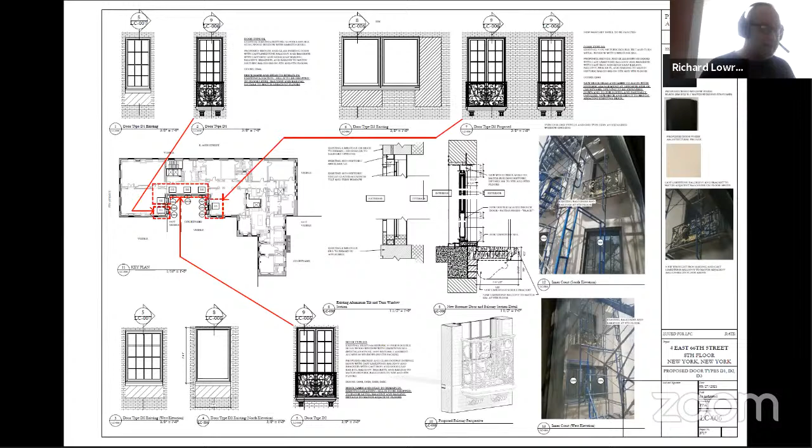Here are the drawings of the proposed architectural bronze French doors and the limestone tinted cast iron balconies with the cast iron railings. And here are the drawings of the proposed multi-light double hung black painted wood windows, which will match the historic window material, finish, configuration, and design. Thank you very much. And Peter Pennoyer and Jennifer Jericaris are here to answer any questions.

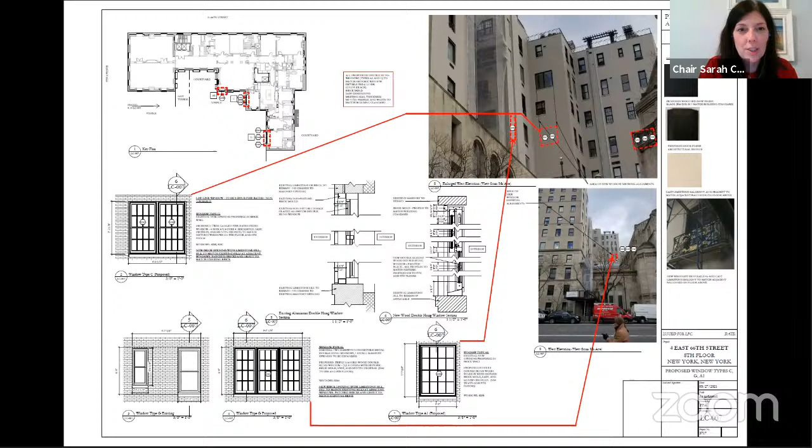Thank you. Commissioners, do we have any questions? All right, I don't see any questions at this time. Let's see if we have public testimony. If you're in the meeting, please raise your virtual hand so we can identify you. And I will turn it over to Lisa to take us through the testimony. Okay, thank you. I see one person with their hand raised from the Upper East Side.

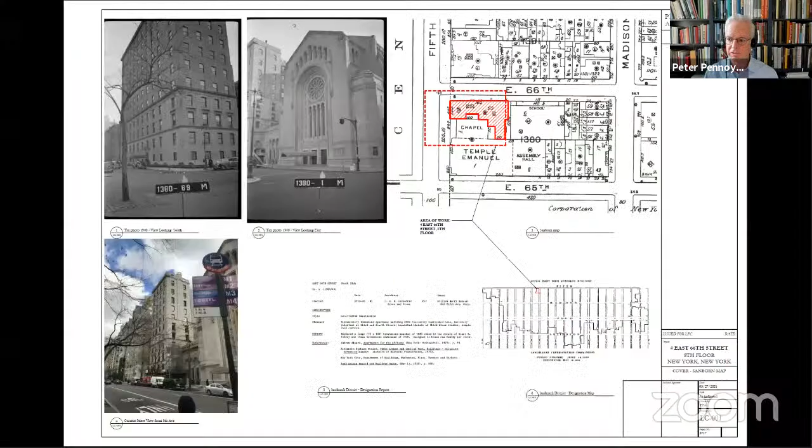Yes, thank you. I would like to note that we are following a previously approved fenestration, and that while the railings may not have been exactly what Carpenter would have designed, we feel they're appropriate in relation to the French doors.

We also have noticed and observed and recorded that only the west-facing ones on the right, on the lower, are actually visible from the public way, from Fifth Avenue, the most distant point. And I also want to note that the disposition of those openings follows the pattern of many of the floors below, which are hard to document because of all the scaffolding.

We do think that in the balance, these are, while unusual, present themselves to a very unusual part of Fifth Avenue where the low-set chapel with its screen wall gives a kind of subset of architectural character to this, essentially what was a courtyard and what would have been a courtyard in a typical building block. Thank you.

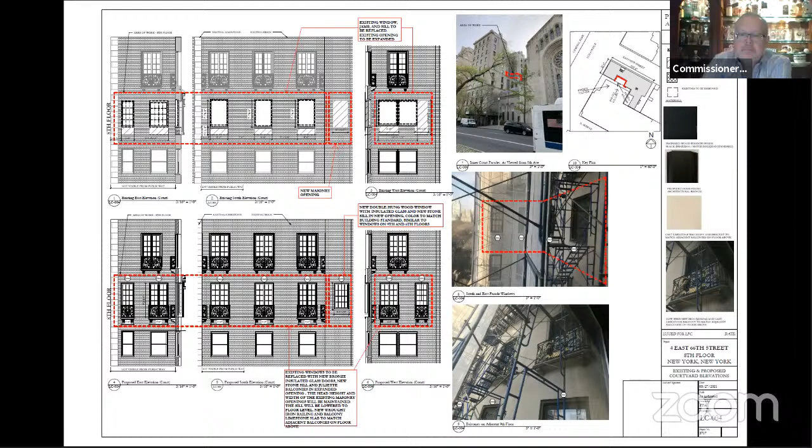I think the presentation clearly shows these facades, the west and other return facades, and I think west and south is what we're looking at. It shows the visibility and the relationship to the existing fenestration. So many of these are not visible and many also do relate to similarly sized window openings elsewhere on the facade, but some do not.

So why don't we begin the discussion? Commissioner Chapin, would you like to start this one? Sure, I think that in general it's approvable. I think it will fit in nicely with the building. Most of the changes that they're proposing are on the courtyard side and not highly visible. However, I do think that the triple window looks really odd and would be distracting, and I don't think the triple window should be there, that there should be just the two windows in the original configuration. But otherwise, I could approve the rest of the proposal.

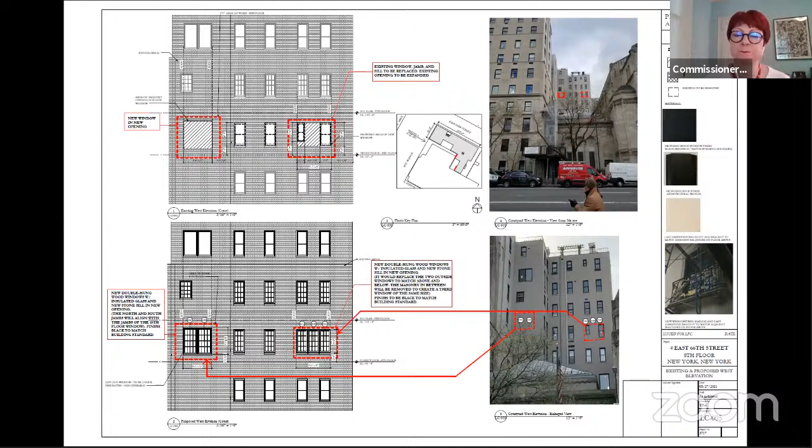Okay, great, thank you. All right, so I think that while some commissioners are comfortable with the triple window because its outside proportions and the sash proportions have a relationship on the facade, the majority of commissioners really believes that the two-window pattern should be retained. So we'll make a motion to approve this application with that modification.

Commissioner Chapin, can you read the motion? Sure, thank you. In the matter of a certificate of appropriateness, Borough of Manhattan, LPC 21-07559, 4 East 66th Street, Upper East Side Historic District, a neo-Italian Renaissance style apartment building designed by J.E.R. Carpenter and built in 1920. Application is to create and modify window openings and install balconies. I note that the building style, scale, materials, and details are among the features that contribute to the special architectural and historic character of the Upper East Side Historic District.

I recommend approval with modifications, finding that the work will not damage or eliminate any significant architectural features or special windows, that the proposed doors and balconies at the courtyard will closely match those previously approved by the Commission immediately above at the 6th floor, that only 2 of the proposed doors and balconies will be visible from a public thoroughfare, that new windows on the visible secondary facades will be seen within the context of other altered window openings, that the installation of single and paired window assemblies is in keeping with the size and position of other openings found on these secondary facades, that the proposed windows will match the historic windows in terms of details, operation, and configuration, and that the work will not detract from significant architectural features of the building or the historic district.

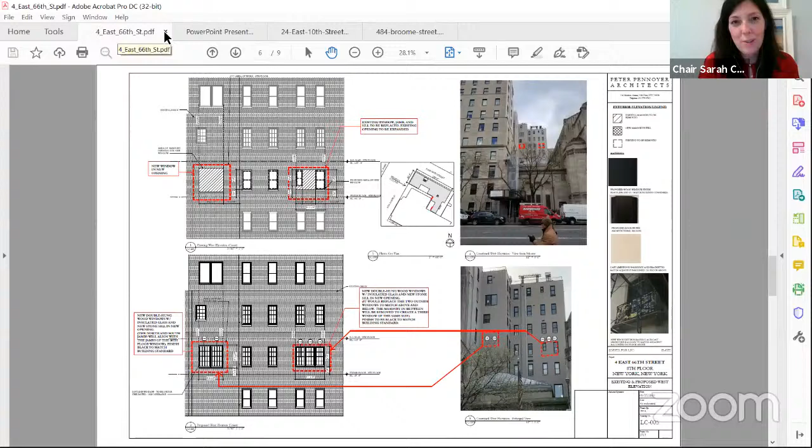So that's approved with the modification. Please continue to work with the staff on that. Thank you very much for your consideration.